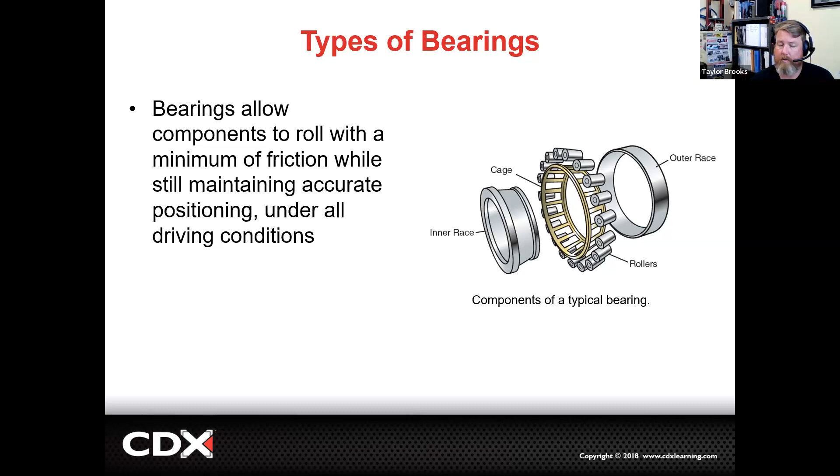So there's a lot going on when we look at individual bearings. We have a wide variety of different types of bearings, and each bearing will have its own specific unique design that makes it beneficial for that particular job.

When we look at wheel bearings versus bearings in between shafts of a transmission, they're going to have different design characteristics that they have to be under. So we'll use one bearing in one task but not in another—they're not going to be all the same.

Obviously too, keeping these bearings lubricated, cooled, and maintained is going to be another key characteristic. To go back to that throwout bearing, there's very little maintenance you can do to it. Early vehicles had an access cover where you could put a little bit of grease—it had a Zerk fitting and you could grease the throwout bearing. But modern vehicles, it's sealed in there, and it's sealed for life.

When we're looking at the life expectancy of a vehicle being anywhere between 150 and 500,000 miles, that bearing's going to live a pretty hard life and have to live it with a very meager ration of grease. And it's understandable if they fail over an amount of time.

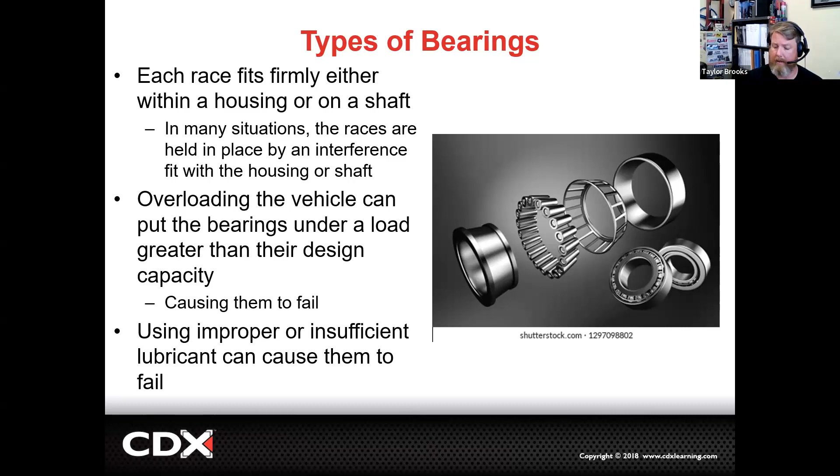Different types of bearings we're going to have fall under two main camps in terms of design, and then they can vary from that point. We're either going to have a serviceable bearing, meaning we can take apart the outer or the inner race and get access to the rollers, the balls, or the needles, and it can be repacked with new grease—you can pack new grease in, clean them, adjust them for preload and tension, and they are otherwise disassemblable.

The second main category is a sealed bearing, and we're seeing more vehicles come with sealed bearings. This is a bearing that is sealed up and not meant to take apart. Often people will look at it as, oh yeah, it's sealed from the factory—the bearing is constructed with your inner race, your roller, the caging system, grease or oil is put in it, and then you have the outer race, and the outer race has metal seals kind of keeping everything together so that once these bearings go bad, they go bad.

You can't rebuild them, you can't repack them, you can't adjust them. They are what they are. Now that being said, there's a lot of people that will say, oh, they don't make it the way they used to, you used to be able to rebuild bearings.

Well, the reality is car wheel bearings now, even for the smallest Hyundai Accent or Honda Civic, are much larger than the front bearings on something like a Cadillac Fleetwood. So they're much larger, much more robust, and able to withstand much more strain and pressure. So having a sealed bearing isn't that big of a deal.

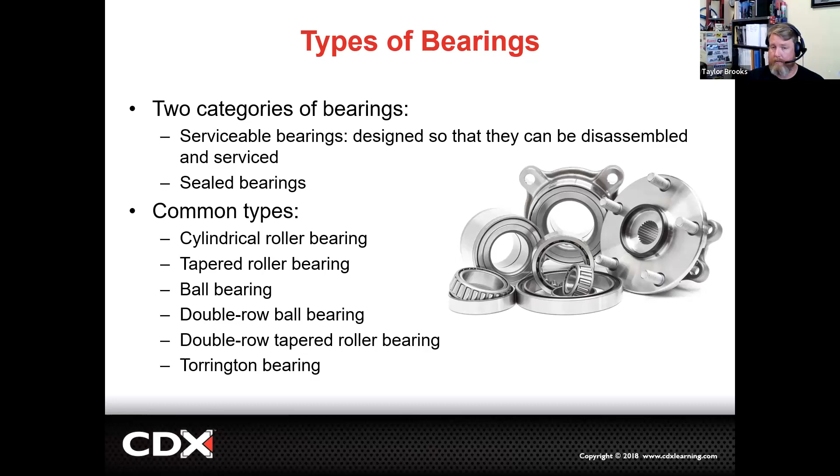Now, whether it's sealed or serviceable, we have a bunch of different designs in terms of what type of bearing it is: cylindrical bearing, tapered roller bearing, ball bearing, double ball bearing, double tapered roller bearing, Torrington bearing, and then solid bearings, bushings, and so on. So there's a bunch of different options out there, and each manufacturer will look at the different design characteristics for each one.

A very simple bearing that a manufacturer might use, and you'll see these a lot on manual transmissions, is a single row cylindrical roller bearing. This has rollers that go around an inner and an outer race and are caged. They can be sealed or non-sealed.

These are bearings used when there's no side load applied to them, so they're just supporting a shaft. That's why we tend to see them on manual transmissions. When we take apart manual transmissions, you'll see this as the front bearing for the input shaft. You can see it as the pocket bearing, which is the most important bearing inside the transmission, and you can also see it supporting the output shaft and the counter shaft.

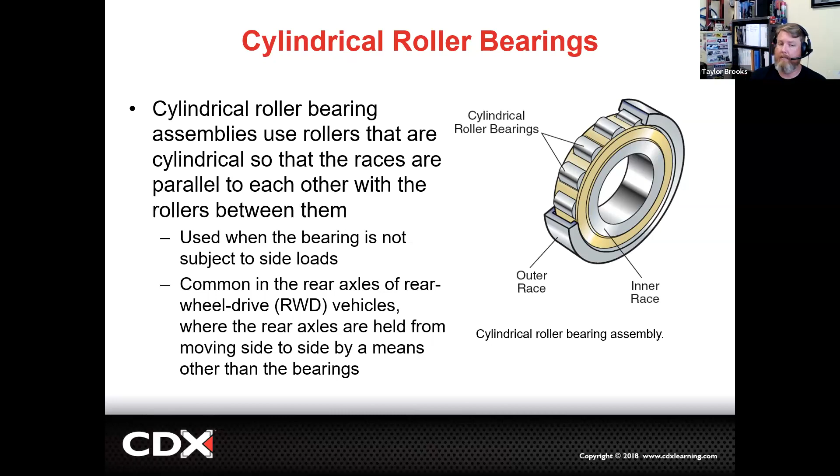They don't like a lot of side load, which the transmission isn't going to give them - it's just reducing friction and supporting the shafts. But where you won't see these is as front wheel bearings. You will see them on rear wheel bearings, but a lot of manufacturers tend to use the other design, a tapered roller bearing, instead because it can handle more torsional load.

Now, these cylindrical bearings tend to either have just an inner race, or more often than not, an outer race, with the cylinders locked in place. The inner race is usually the shaft of the transmission or transfer case or whatever it happens to be, and when this is the case, that is a wearable surface.

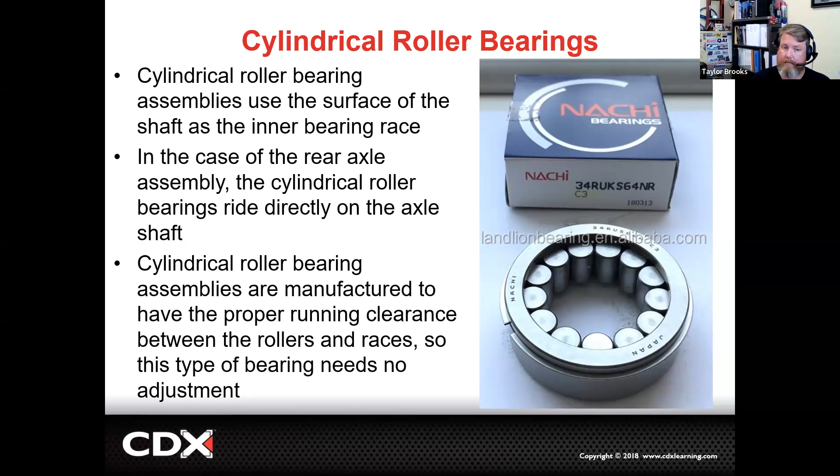Now, the next design, which you see a lot more often because it can handle side loads, is a tapered roller bearing. Under the same kind of guise and design as our roller bearing, we have cylindrical cones, cylindrical bodies going around an inner and outer race, but the difference is they're at an angle. So our inner and outer race will be at a particular angle, and this angle varies depending on how much side load or thrust that bearing can support.

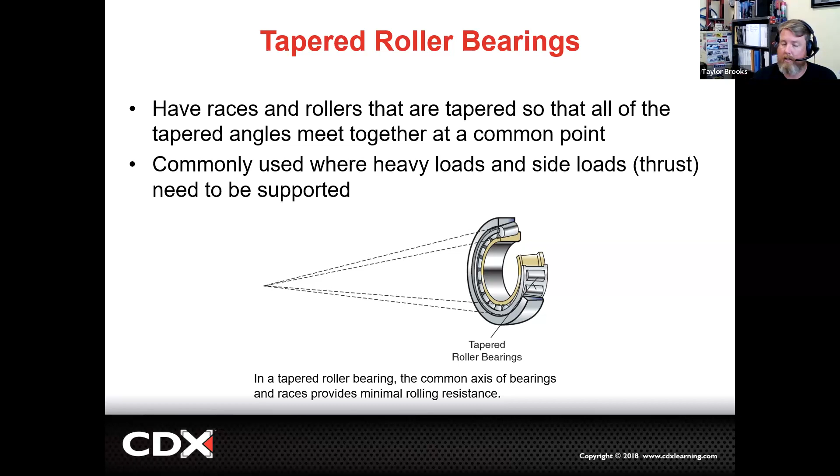The greater the side load, usually the more thrust it can handle, but the more preload and strain the bearing will have. Usually you're looking at anywhere between 20 to 30 degrees. I have seen 40-degree tapered bearings - they do exist, but again, it's dependent on the manufacturer. These bearings operate under very light load and friction, but they do require preload, an amount of pressure put on the inner and outer race against the rollers, so as to not have them fail.

Now, you can have it either as a shim or as a threaded collar. What preload is doing is putting a set amount of load or tension on that bearing to allow for full contact against both races.

Why we have to do this is if we don't have the preload, the bearing will chatter on itself and it'll fail prematurely, usually pretty quickly. So it's very key that anytime we're replacing a tapered bearing, we always double check our preload.

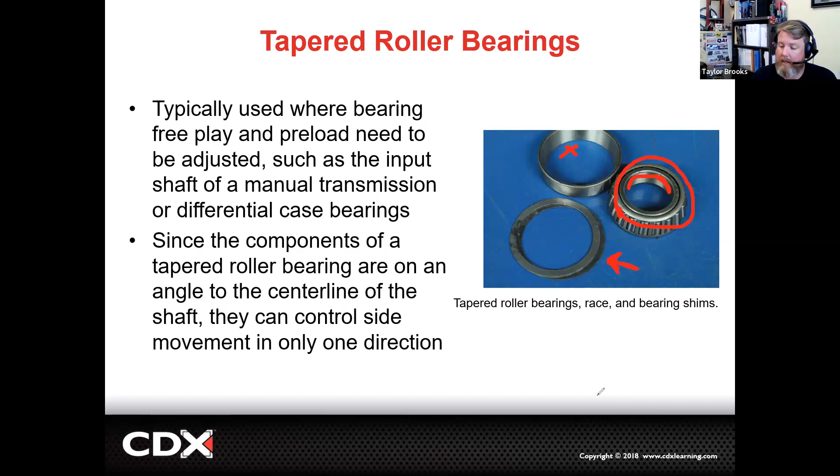Our preload can be checked usually with a turning torque or breakaway torque wrench to measure how much it takes to start to rotate that bearing.

Now, tapered roller bearings can be used in a bunch of different applications. They can be in the supporting role of the different shafts inside of the transmission case. You'll find them in transfer cases, and you'll definitely find them in differentials - these will be the side bearings, the pinion bearings, and often the wheel bearings in the rear.

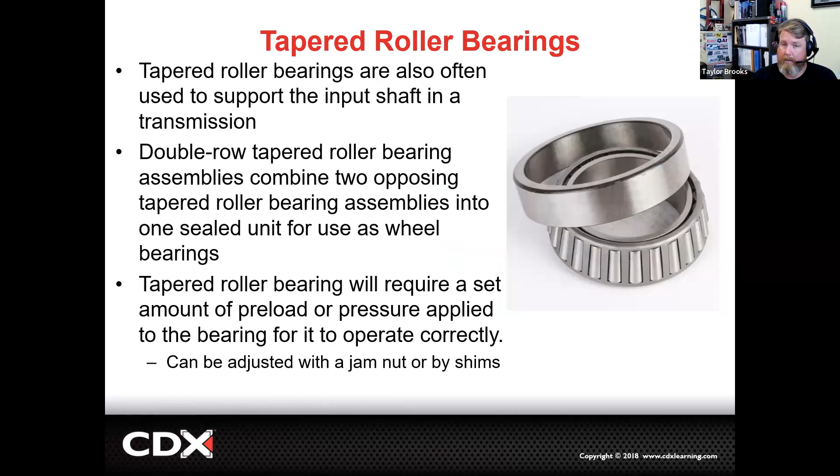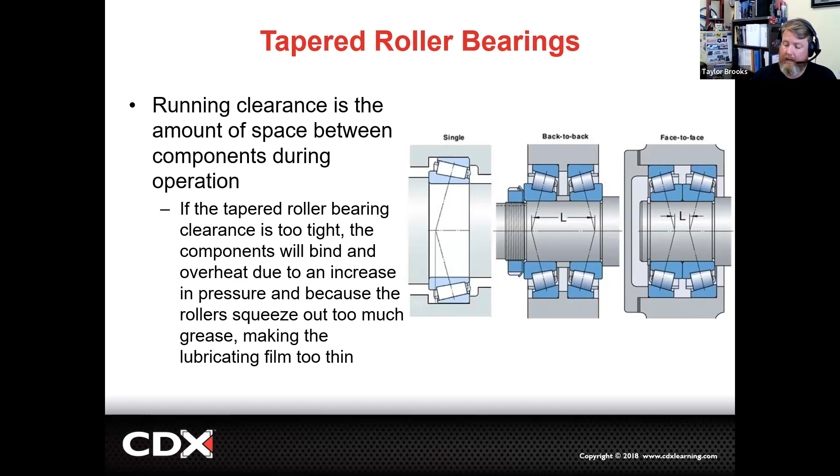We can also have these in a double row configuration, which we'll talk about in greater detail, to support an axle shaft or more often a wheel bearing. Because the tapers are going opposite of themselves, they're able to withstand a lot more thrust load being applied to them.

We can also have ball bearings. Ball bearings operate off of a much lower friction rating than the other ones, meaning they are more efficient. The downside is that our straight roller and tapered roller bearings have really big surface area, so they can handle a lot greater loads.

For ball bearings to handle greater loads, we either have to increase the diameter of the ball bearing itself, which increases the overall bearing size, or we have to run them in multi-row configurations.

Our ball bearings will have kind of unique inner and outer races that allow for full support of the roller ball itself, and that will control our side load, so we don't have as much chatter as we would with a regular roller bearing.

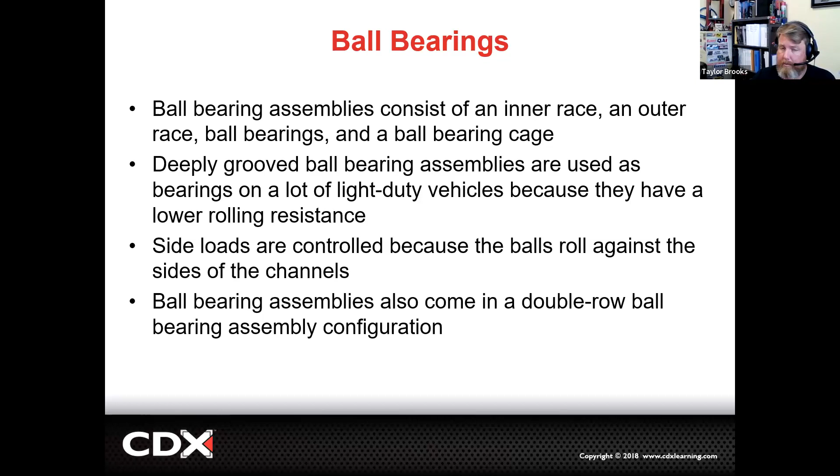Again, we can have these in multiple configurations, double row or single row. Usually we're going to see double row configurations as wheel bearings, and that increases the surface area that was its kind of weak link. When you combine them as a double row bearing, they do support a lot of side load plus a lot of regular weight.

More often than not, when we have them as a double row, the inner race will be two pieces - so you'll have a top or bottom, or left or right inner race - and then the outer race will be one piece. That's because the outer race is usually going into the fixture of the steering knuckle and/or the transmission case to support everything.

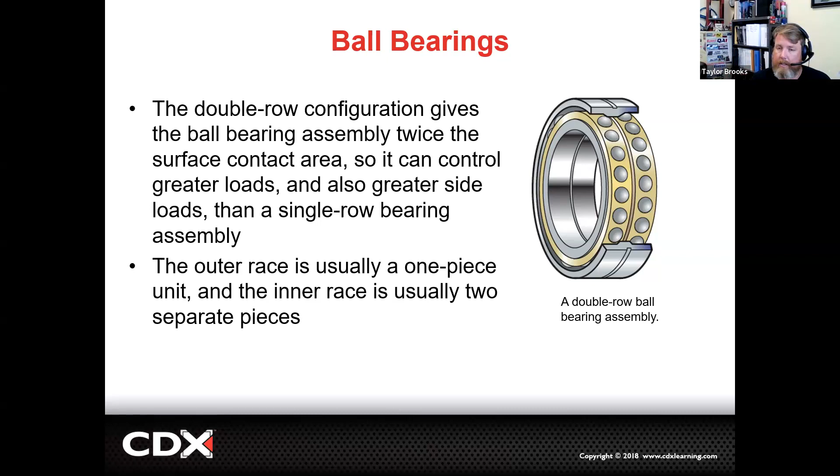Inside of our transmission and transfer cases, we'll see something called a Torrington bearing. A Torrington bearing is a very small, flat, thin roller bearing, but the difference is, where a straight roller bearing or tapered roller bearing has rollers very close together - in a tapered roller bearing they'll have some separation with the bearing cage, but in a straight roller bearing the rollers are rolling against themselves as well as the inner and outer race.

A Torrington bearing is going to have separation. A Torrington bearing is going to be able to control thrust movement inside of a transmission or transfer case - that movement in or out. You will see a lot of these in place for low friction applications.

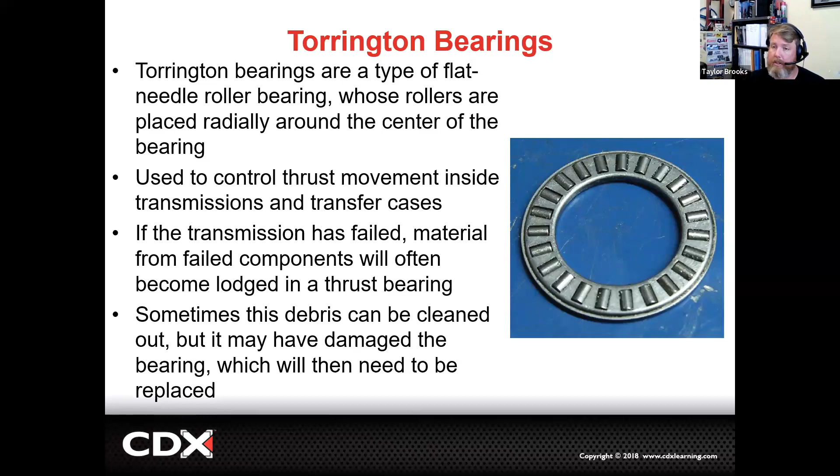They can also be replaced with a bronze bushing. However, that does build up the friction and make that transmission less efficient.

Friction bearings or bushings are solid, single piece bearings or bushings. They're not going to have any rollers. More often than not, inside a transmission we'll see these supporting shafts on early transmissions that didn't need the efficiency.

But primarily, where you will see these on modern vehicles is our pilot bearing. The pilot bearing supports the end of the input shaft so the clutch can operate, and is typically located in the back of the crankshaft or the flywheel.

These can be made of a bunch of different materials, but usually they're made of a material softer than the shaft it's supporting. So if our input shaft is made of steel, we can have these made of bronze or brass, a softer material.

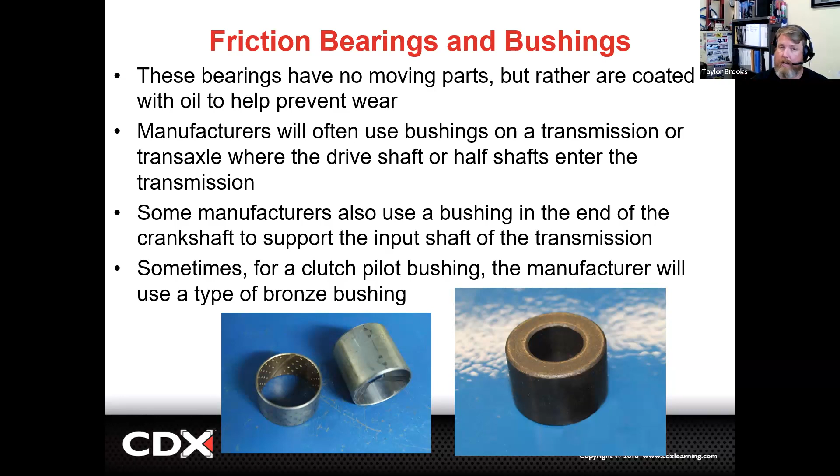In some cases you can have some lubrication on these bushings, but for the most part these are going to be dry bushings, so the softer metal acts as its own lubricant.

Now, all of the different types of bearings we talked about in the last couple of slides can be a sealed design. A sealed design, as I mentioned at the beginning of the lecture, is a bearing where the inner and outer race are stuck together mechanically, with a metal seal, and all the grease and lubricant is pre-filled into that bearing and never needs to be changed.

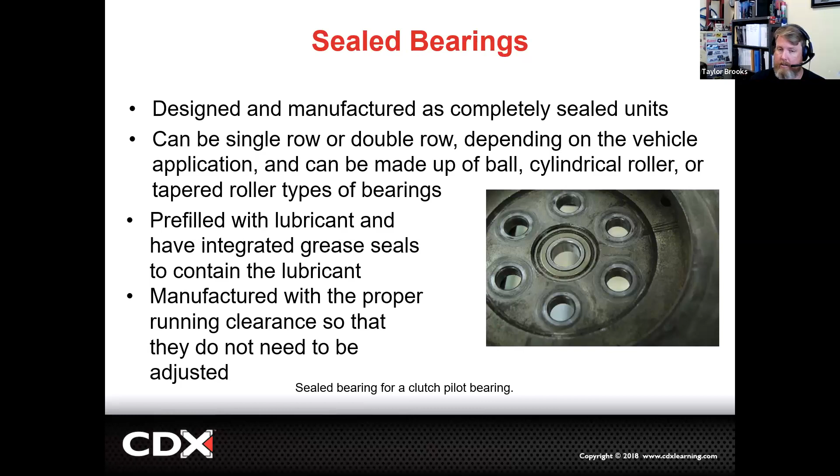The running clearances on these are already set, so any preload that's in there—because you can have a tapered bearing or a double taper roller bearing—will have the set amount of preload and lubrication already installed. A lot of modern wheel bearings are set this way.

This can be supportive of a wheel bearing hub assembly and the wheel face hub with new studs, as well as usually a pickup point for the ABS sensor or wheel speed sensor.

That can be used off of a magnetic pickup wheel, or we can actually have a magnetized part of our wheel bearing race itself act as the tone wheel for that speed sensor, for use in the ABS and traction control.

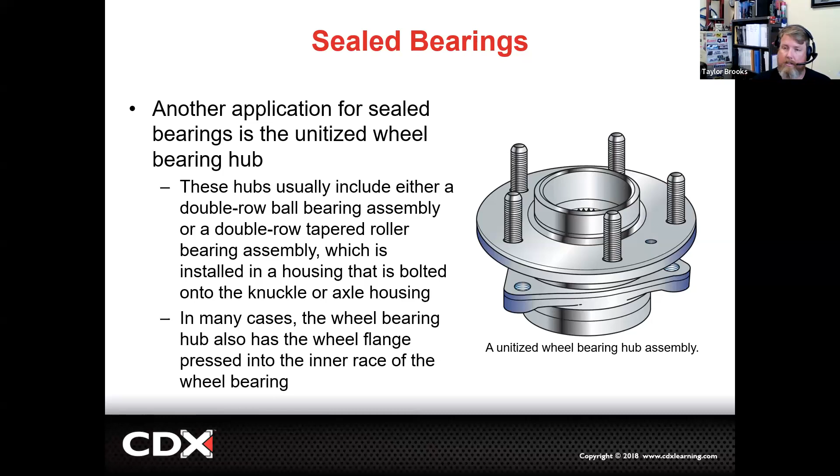When we look at serviceable wheel bearings, that indicates we can take the bearing apart. However, we still need the grease and lubricant to stay around the bearing rollers, so we'll have to have a serviceable seal or gasket.

Now, these gaskets or seals typically are considered a dynamic seal, and you will see a test question about that. A dynamic seal indicates that it will statically be in place, but it will be sealing something that is dynamically moving, like a spinning shaft or a moving rod.

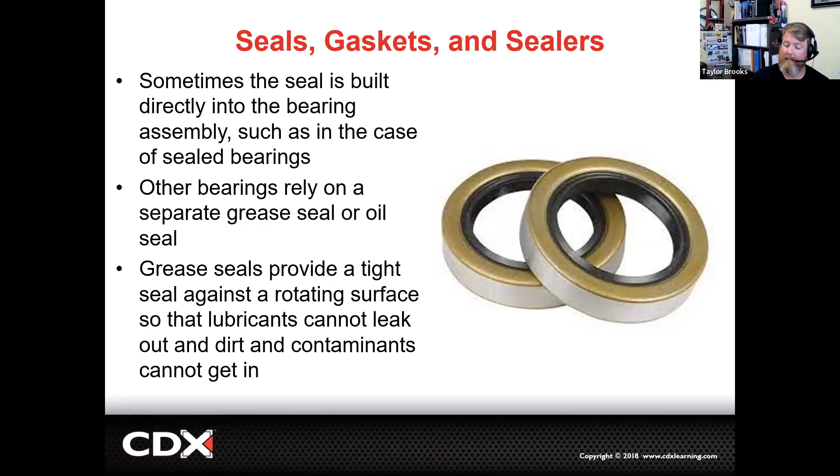These seals have to be able to keep dirt and debris from getting in, but also allow the lubricant to stay in place. They've got a really, really tough job.

One way to make that job a little easier is with lip seals, which have what's called a garter spring. The garter spring puts tension on the lip seal. The lip seal comes to a point and rides across the shaft or sealing surface, and that spring provides constant tension.

That constant tension means dirt and debris can't get in, and grease and oil can't get out. The lip design has a specific direction that it faces.

So oil that might be forced out through centrifugal force actually gets turned back around and sent back into the case via some fins, and dirt and debris won't be able to get in through the other, usually reinforced, dust shield portion of the seal.

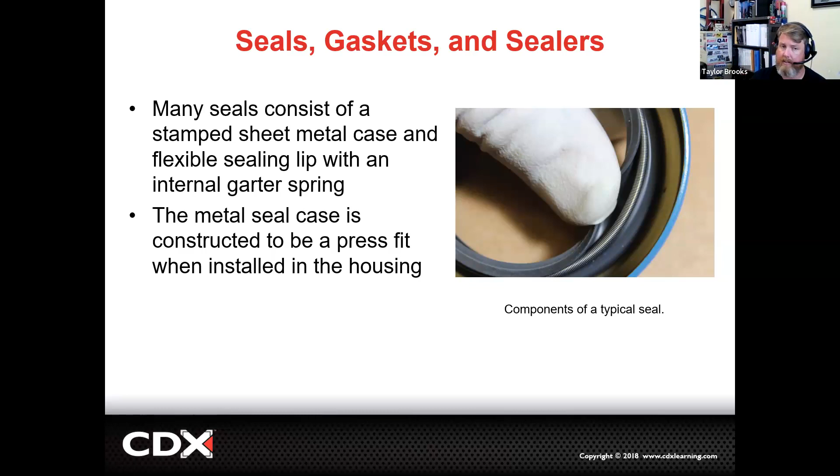One interesting thing that happens with garter spring seals is that because the garter spring is putting constant tension on the sealing lip, over time you can wear a groove in the sealing surface.

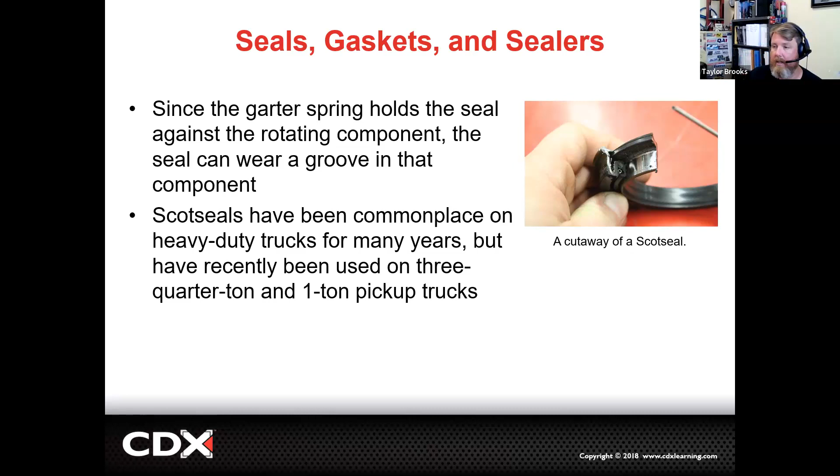It's kind of funny because a rubber seal can wear a groove in a steel component. Quite often, what can happen is that sealing surface needs to have either a sleeve put over it or it needs to be remachined, and an undersized or oversized seal installed due to that machining process.

To allow these dynamic seals to operate correctly, they will have an interference fit against the housing they're riding in. So if it's supporting a steering knuckle, spindle, or shaft that spins dynamically independently of the hub it's on, the seal still needs to be fixed into that. There will be a slight interference fit, meaning the outside diameter of our seal will have a greater dimension than the inside diameter of the hub it's being applied to.

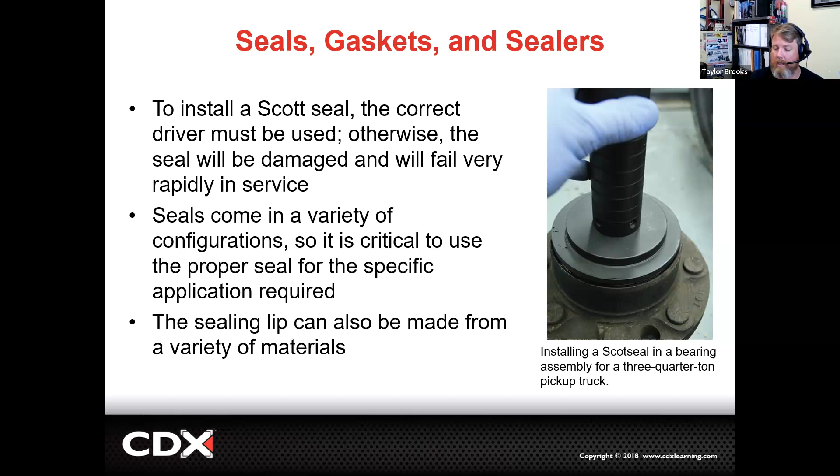It's really important to use the correct tool when installing these seals so you don't damage them, punch them all the way through, or get them crooked. That's a fault I have quite a bit - if you don't have the right tool and try to very lightly tap in the seal, I tend to get them crooked. For whatever reason I have a hard time with that. So it's always good practice to find the correct tool so you don't cause additional damage or wreck your brand new seal before it's even been used.

We can also have just regular O-rings. Now these would be considered non-dynamic. So in this case, we have an output shaft or a speed sensor on a transmission case, and it has an O-ring located on the body of the sensor itself. This is non-dynamic - the speed sensor isn't moving, neither is the case. It's just kind of a static seal preventing dirt and debris from getting in and fluid from getting out, but it's not going to cause an issue where we're wearing a groove on the case or on the speed sensor itself.

Now these seals, I should say, do go flat over time. So where you have an issue in terms of wear, or why they might leak, is either rapid expansion and contraction during different thermal events of that component, which can cause the seal to go flat over time. Then fluid, dirt, and debris can get around that, and the seal is otherwise not usable anymore.

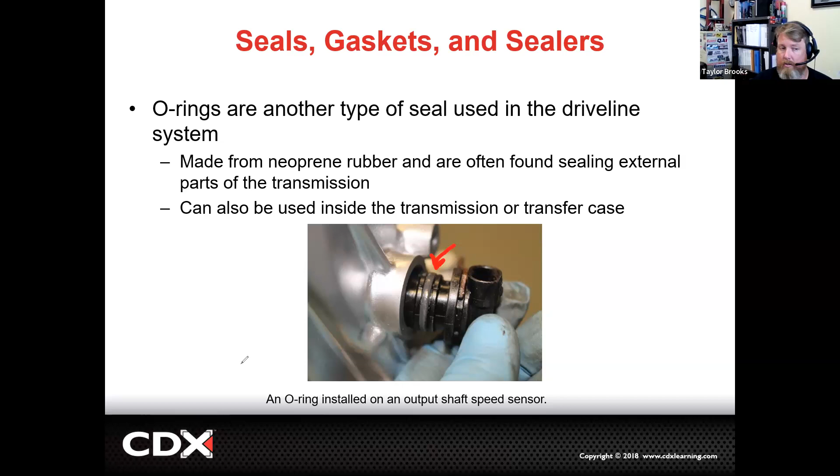We can have a variety of different gaskets too. Oftentimes, when we're looking at transfer cases and transmissions, we won't have any gaskets. Most manufacturers go to where they have such a fine machine surface that we'll usually be using an anaerobic style sealer or gasket maker. Anaerobic means lack of oxygen. So we have such a fine machine surface that this anaerobic sealer can seal up, and because there's a lack of oxygen it will harden and prevent fluid from leaking out and dirt and debris from getting in. But we can also have rubberized seals with metal membranes inside to add some rigidity.

We can have straight rubber or cork style gaskets. These gaskets require a small amount of fluid to expand out so that they can swell and operate in a manner that takes up all of the different little variations. And then we can have different paper gaskets - this will be a special fibrous paper that allows it to expand out and seal everything.

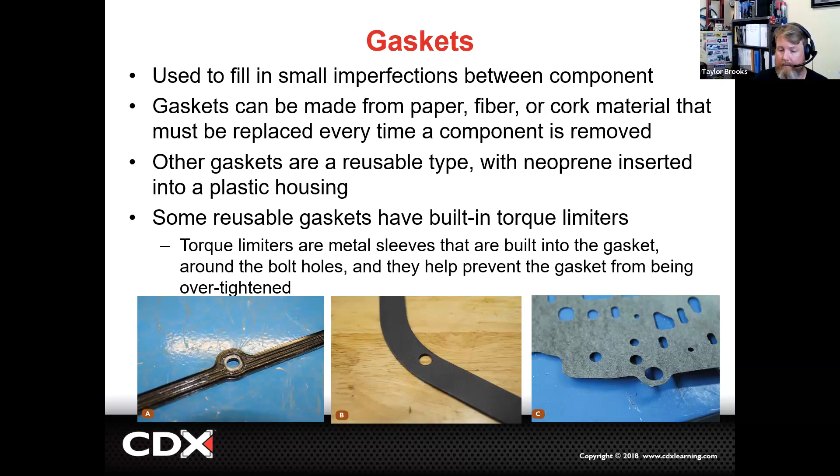I brought up that some cases will use an anaerobic sealer - an anaerobic sealer is a gasket maker. Another common one is RTV, standing for room temperature vulcanization. What that means is that under ambient normal temperatures, the liquid sealer will come out of the container and turn hard based off of just the normal room temperature.

Oddly enough, some of this RTV does require a set amount of humidity in the air for it to fully harden. So you'll see some mechanics have a little spritzer bottle, especially in dry areas like the Southwest here, and they'll spritz the RTV to try to encourage it to harden up and seal. Now RTV is preferred by manufacturers now because it fills the machining imperfections, and it's really cheap.

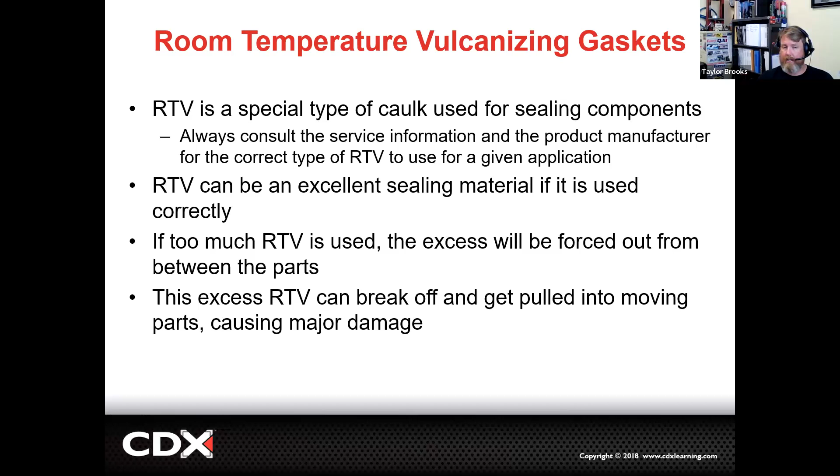You can have a tube of sealer be the one-size-fits-all sealer, so the manufacturer doesn't have to design gaskets for each individual case half.

It is important, though, to make sure that we get the right sealer for the right job. If you go to the parts store, there's a multitude of different sealers you can choose from as a mechanic. But it's going to be really important that we make sure we get the right one based off the material we're using and the fluid it's trying to seal against. Also, temperature and how much it will expand and contract are two big key characteristics to make sure we get the right sealer for the right application.

Where it is an issue is on transfer cases. Almost all modern transfer cases have a pump and a pickup, and that pump is used for our locking clutch for 4 low versus 4 high. If we have too much silicone or RTV sprayed into the case of that transfer case, it can plug the pickup and cause a lack of lubrication in that clutch, which can burn up and prematurely damage the transfer case.

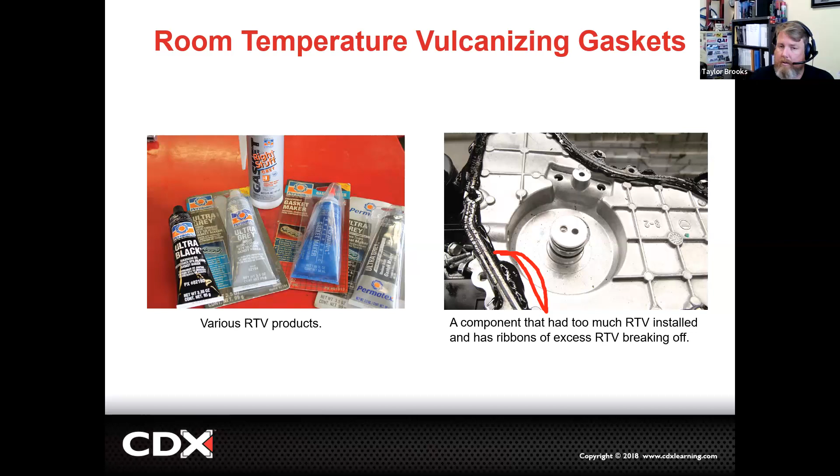So it's really important we use the right amount, and follow service information for not only the correct RTV silicone, but also the right amount to apply. Where we'll also see some sealer needed is on the threads of the case for the transmission and transfer case itself.

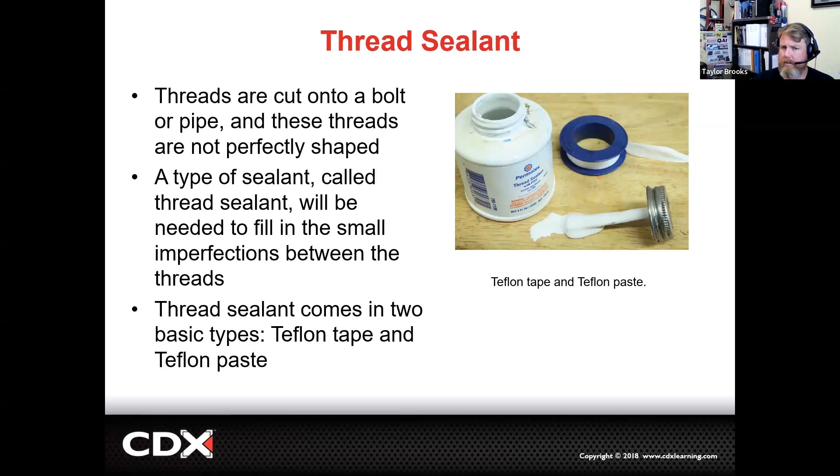I've also seen thread sealant needed on the pinion nut of the pinion shaft of the differential, but we tend to use liquid Teflon sealer. Don't use tape - honestly, it's not a good idea to use tape in any automotive application. The liquid Teflon gets into sealing the imperfections of the case at a greater rate, and we don't run the risk of the tape burning and/or collapsing or going into a bore. So use liquid Teflon when you can.

Removing these gaskets is going to be really important. The machined surfaces of our transmission cases, transfer cases, and differential cases are very finely machined, and they're also almost always, with the exception of differentials, made of aluminum. So we need to use a non-marring way to remove the material.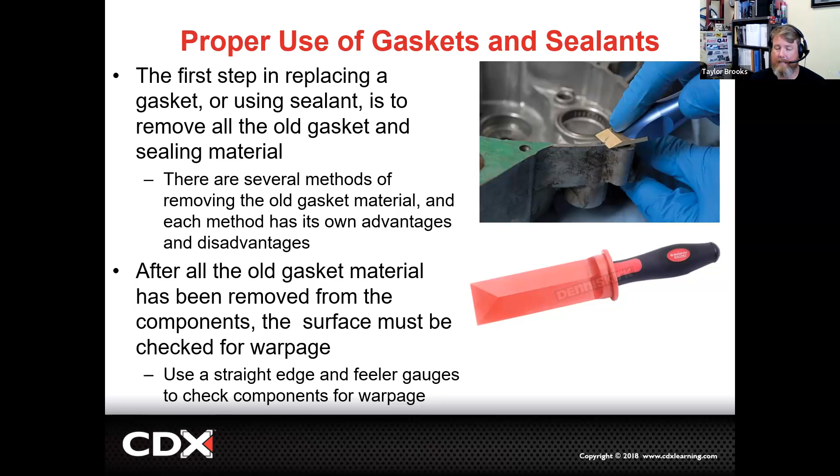But we do want to make sure we are not causing any warps or damage when removing these gaskets. A good check to do afterward is to go through with a feeler gauge and check for case warpage. We hold a straight edge across and use a feeler gauge - you don't want to be over 2 thousandths of an inch. 2 thousandths is usually the general limit we can't exceed for case warpage or difference in surface. We're also looking for any types of over-torque or damage to case structures.

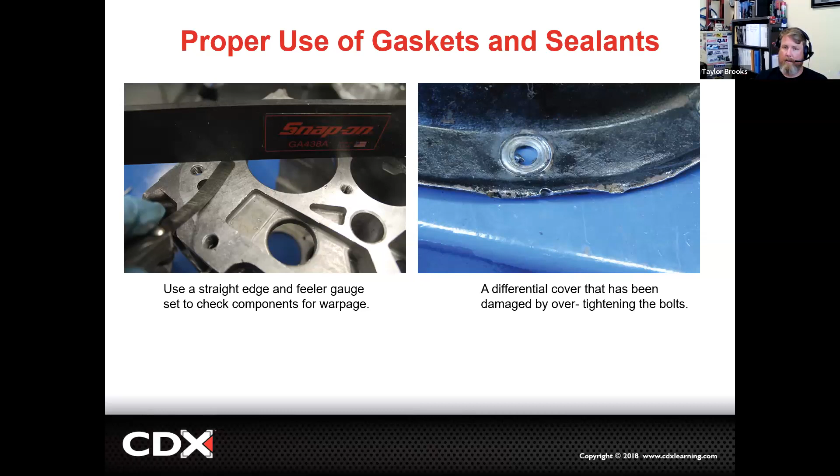This is especially the case if we have a transmission case that's aluminum and we have a metal pan that's bolted to it. More often than not, they can very easily get over torqued, and we can see that with the photo on the right there, where that bolt has started to groove and eat into that pan or that cover.

I often, to correct some of these issues on steel pans, use a body hammer, and oftentimes a couple light taps with the hammer will straighten it out. A ball peen hammer will do the same thing.

The reason why I like a body hammer is you can get body hammers as either a shrinking or a stretching hammer, or you can get them as a neutral one. A ball peen, depending on how you hit it, will shrink or stretch the material. So ideally, you want to try to maintain it as flat as possible. You don't want to hit it on the side or anything with the ball peen - you hit it nice and flat and straight with a regular hammer.

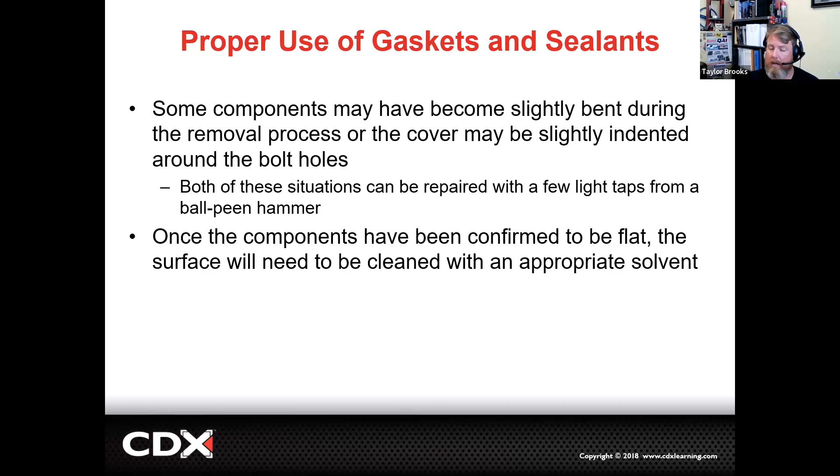If we have a gasket, or if we don't have a gasket, but we have multiple bolts on the flange of whatever device we're torquing, whether it be a transmission case, a T case, differential cover, or adapter housing, we want to make sure that we're using the proper torque sequence.

When we have a gasket, the gasket has to be collapsed down in a manner to where the forces evenly distribute on it. So we try to go in a cross pattern to allow for that gasket or sealer to flatten down nice and even and not have one side up over the other, because that can cause a leak, as well as damage the threads and potentially cause a crack in the main housing of the unit. So following the proper torque specification and then also following the sequence is really important.

Even if you don't know the sequence, if you go in a cross pattern, going across to the next side and then doing that in a spiral, you're usually going to be able to torque it nice and even without any dramas.

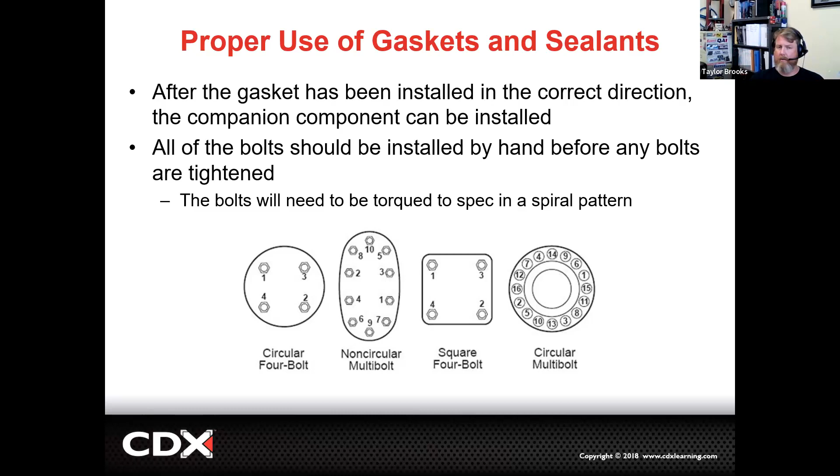Now, lubrication is going to be the main thing that we are trying to keep in with these seals. Having the right lubrication is going to be very paramount. Each transmission will use different lubrication based off of a couple key factors.

For a manual transmission, we're almost always going to have a determining factor being what the synchronizer construction is. The synchronizers can either be solid brass or bronze, and in that case, we can use gear oil. Usually, though, we're using a lighter gear oil. In fact, in some cases, on some Mercedes transmissions serviced in Chrysler vehicles, you're using engine oil - 5W-30 or 5W-40 engine oil. You're not using anything heavier than that, because heavier materials would not allow for smooth and frictionless operation.

If the friction lining material on the synchronizer is paper, then we will be using ATF, automatic transmission fluid, instead of gear oil. The reason for that is that friction lining is going to be very similar to that of what we're going to have in an automatic transmission. It's going to be a paper-based friction liner, and that will then require the use of automatic transmission fluid because it can withstand the different temperatures increasing and decreasing for that paper, as well as prevent it from shrinking, and will allow it to be swollen in the right dimension.

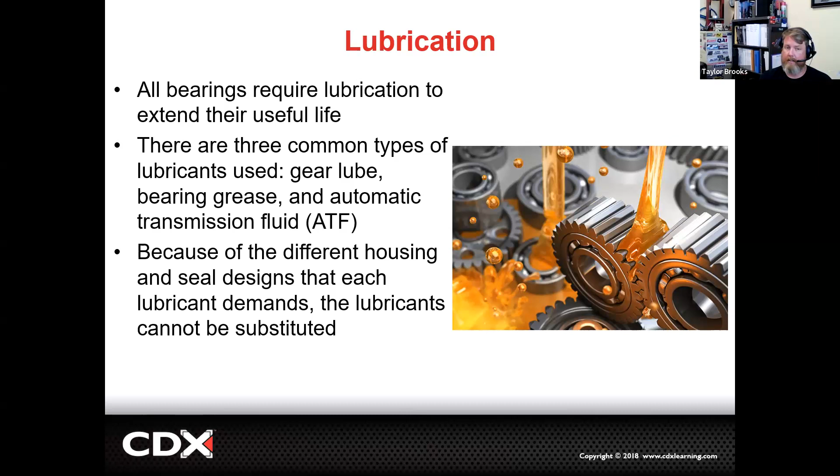Always refer to service information anytime we're looking at servicing the transmission and or differential. When we look at a differential, for instance, it might take a multi-grade weight or it might take a single weight, and the service info will give us that information.

A main thing to look at for a differential, though, is whether or not it has a limited slip set of clutches to where we need to put a friction modifier in the fluid. The friction modifier is going to allow for conditioning of those clutch discs so that they don't slip. If we don't have the friction modifier in it, we're going to cause the clutch disc to chatter and ultimately fail prematurely.

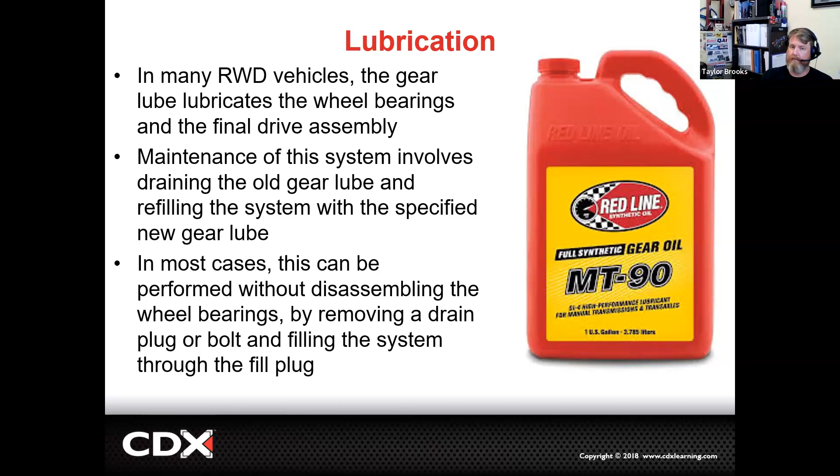Checking the level on a lot of these systems is pretty simple. Almost all of them will have a fill and a drain plug.

Automatic transmissions often require removing the pan to drain the fluid. But in manual transmissions, we're almost always going to have a drain plug with a corresponding fill plug. Same thing with a lot of differentials. However, if it's an iron differential, oftentimes we have to remove the cover to drain the fluid. But these drain and fill ports are put there for easy maintenance.

Anytime I'm doing service on a case that has a drain and a fill plug, I remove the fill plug first, for a couple reasons. The first reason is you'll be able to check the existing level. Oftentimes the fill point for our transmission cases, or differential cases too, is going to be right at the bottom of the threads of the fill plug.

You especially want to do this if you know the system has no leaks. If the system has leaks, you're checking to see how much fluid has leaked out, because potentially that's where you might want to start inspecting for damage. But if there are no known leaks and the system's been sealed from the factory or by reputable mechanics, we want to check the level because it might be slightly lower. Filling it too high would cause the fluid to cavitate, can cause bearing failure, and can cause the fluid to be pushed out of the seals, typically the vent or the pinion seal if it's a differential.

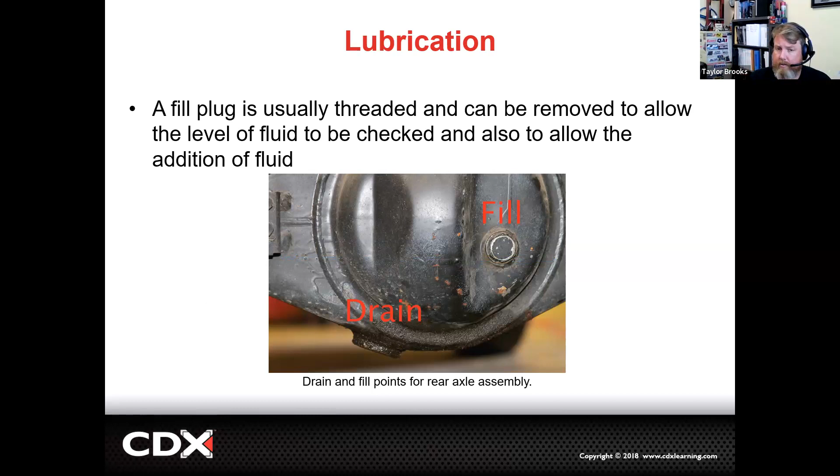Now, the viscosity rating is its impedance to flow. Oftentimes we're going to have multi-viscosity oils inside our transmissions and differentials. Our transfer cases tend to either use a single weight gear oil, or more often than not, a specific automatic transmission blend. A lot of times they're using their own specific fluid, like this is what we use, and it's only used in transfer cases.

But our multi-viscosity oils will have a viscosity that changes based on temperature. The W indicates cold weather, or 0 degrees resistance to flow. The second number, without the W, is the resistance to flow at operating temperature. We're going to have much thicker viscosities for gear lube than we otherwise would in an engine or anything else, up to 75W-140 as some of the options.

Based off of that thicker viscosity, that can obviously really affect the efficiency of how that transmission or differential operates. So it's very important to refer to service info to get the right weight oil, so as not to decrease our efficiency.

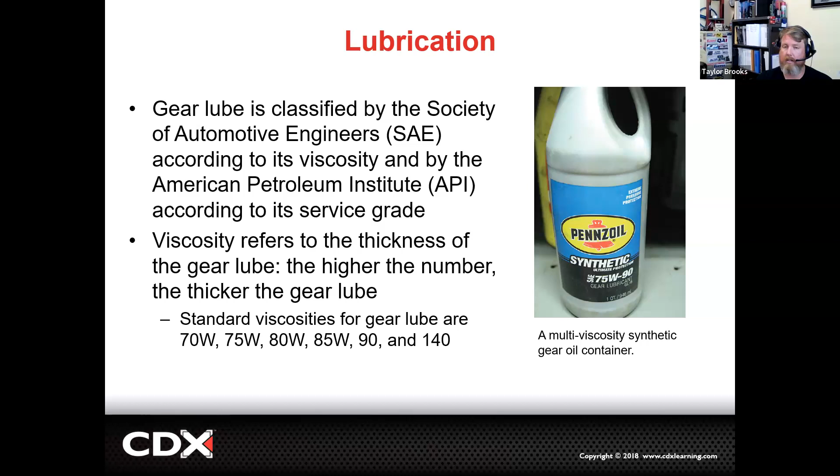These oils will also meet different ratings. They'll meet an American Petroleum Institute, or API, rating. We're looking at modern oils being GL5 and GL6. The book is a little out of date here, calling for GL4. The nice thing is, if you have an older vehicle that calls for GL4 rated oil, the new oils are backwards compatible, meaning if you have a GL6, it goes backwards toward that GL4 and can be used.

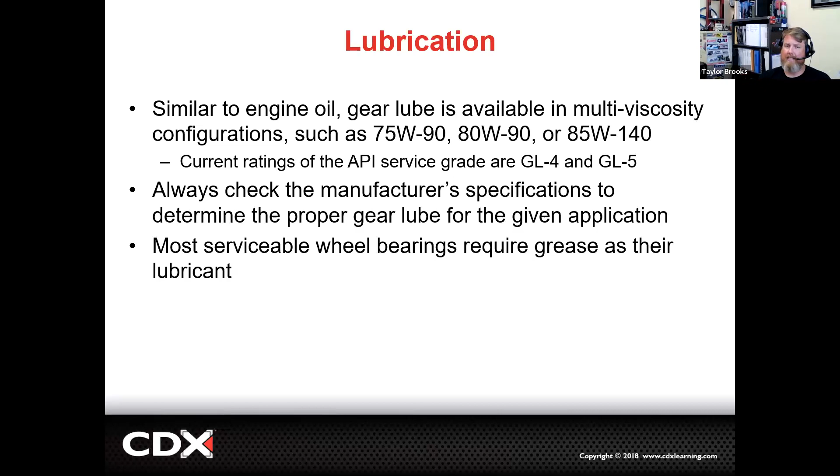Now, in terms of wheel bearings, they're usually going to have high temp grease, and grease is going to be much thicker than our gear oils and require a specific temperature rating. Almost always, you're going to have high temp grease for wheel bearings if they're a serviceable wheel bearing. Based off of that, we still want to make sure we're looking for the proper service information, so we're not using a grease that's not applicable.

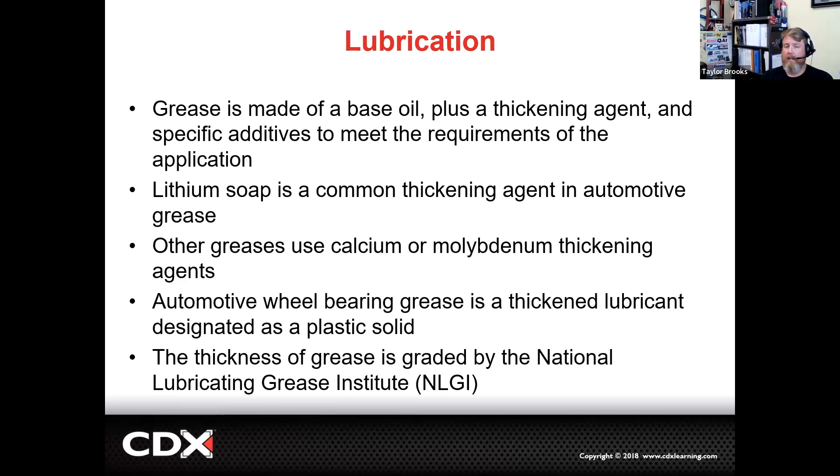Oftentimes these greases can have molybdenum in them, which is a darker material, often called by the shorthand term moly. These moly lubes allow for low friction use, but also allow the material to withstand higher loads.

As I brought up before, oftentimes some manual transmissions will use automatic transmission fluid. One key characteristic for that is the construction of those synchronizers. If this is the case, oftentimes transmission manufacturers will put a sticker on it, like what we have photoed on the right for our T56 transmission, which is a 6-speed transmission made by Borg Warner and Tremec. These transmissions will use automatic transmission fluid.

Just like the GL ratings for gear oils, in this case, this is calling for Dexron 3. If we have Dexron 6 or 7, which is what is out on the market now, it is backwards compatible and will work.

There's also a GM synchro mesh transmission fluid. That synchro mesh transmission fluid is a special transmission fluid that is a little bit thicker version of automatic transmission fluid. So it is safe and compatible with paper synchronizer rings, but adds a little more stability and stays more resistant to flow and cling on to components when used in a transmission.

It's also Pepto-Bismol pink, which is a little bit weird. Automatic transmission fluid is kind of a cherry limeade or cherry kind of color, but you can still see that it's see-through, to where oftentimes the synchro mesh can look like solid pink Pepto-Bismol.

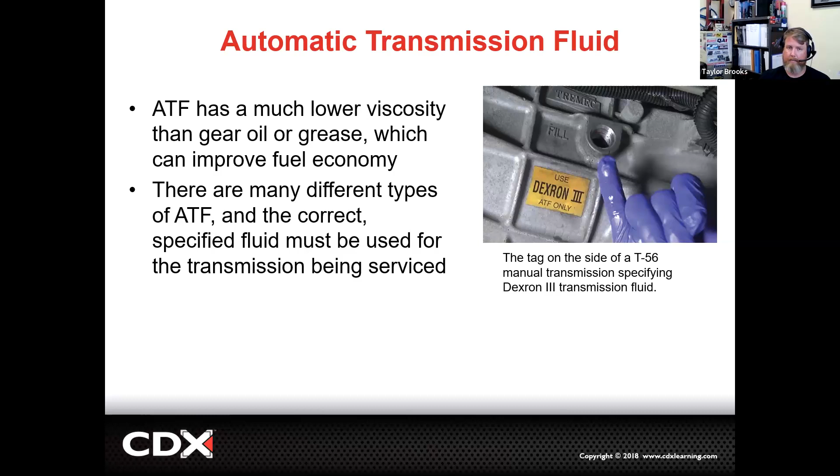Now, diagnosing bearings for noise is going to be the number one thing that you're going to see for why your bearing possibly has failed. They will talk to you to let you know that, hey, I'm not happy. More often than not, you're going to be diagnosing a bearing that has failed as a wheel bearing. Wheel bearings tend to not live as long a life, and that's usually because of the driver hitting large potholes or curbs or being overloaded. Over time, though, these wheel bearings can just wear out and require a replacement.

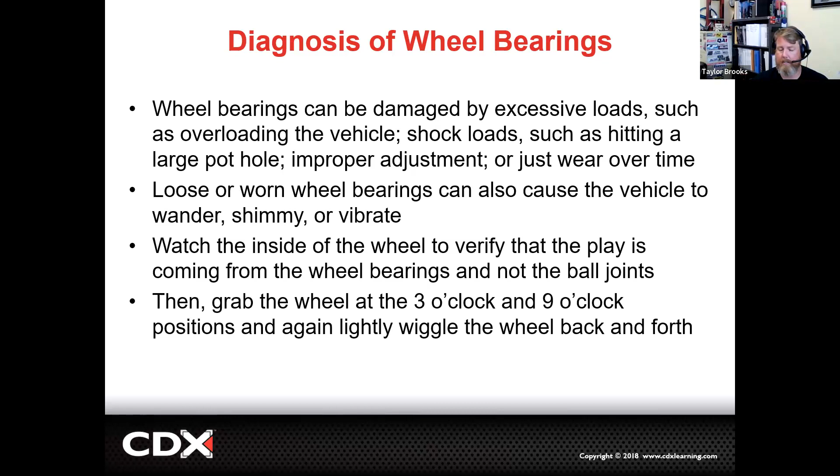Checking for loose wheel bearings you can do with a dial indicator, or by simply grabbing the wheel at the 3 o'clock and 9 o'clock position and moving it slightly. When moving it around, you can check multiple different areas and the wheel bearing will clunk. If you can only move it up and down in the 12 o'clock and 6 o'clock position, that's usually going to be ball joints. If it moves directly across, that's going to be tie rods. But if you can move it in a variety of different locations, that's usually an indication that the wheel bearings have gone. So the mechanic here is giving a visualization of what that might look like.

But you can also diagnose wheel bearings in a couple other ways. Usually driving the vehicle is going to be a big one. Often if we have a live axle vehicle, these wheel bearings can transfer their noise up into different components. We also might have a difficult time trying to delineate the noise, and quite often we're going to have to move the vehicle to one side or the other. Based off of whether the issue is with the bearing loaded or unloaded is how we're going to determine whether or not it's making the noise.

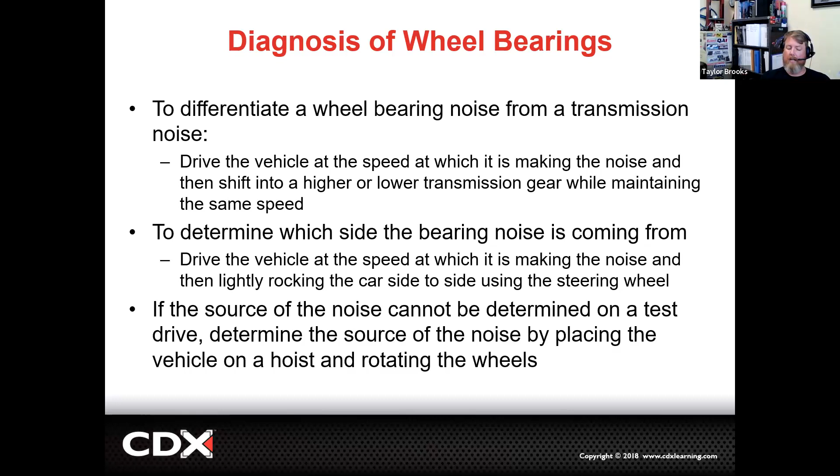So if we have a right front bearing making noise, if we turn the vehicle to the left, that can load the bearing up. And if the bearing is making noise only on coast, with the bearing loaded, it will quiet up, versus if we were to turn to the right, the bearing would become unloaded and thus make noise. Again, that's going to be based off of whether or not the bearing is making noise unloaded or loaded, and you're going to be driving the vehicle from left to right. Then you can monitor the frequencies or the noise with chassis ears. Chassis ears are little microphones that you can place on the vehicle in multiple different spots to diagnose that.

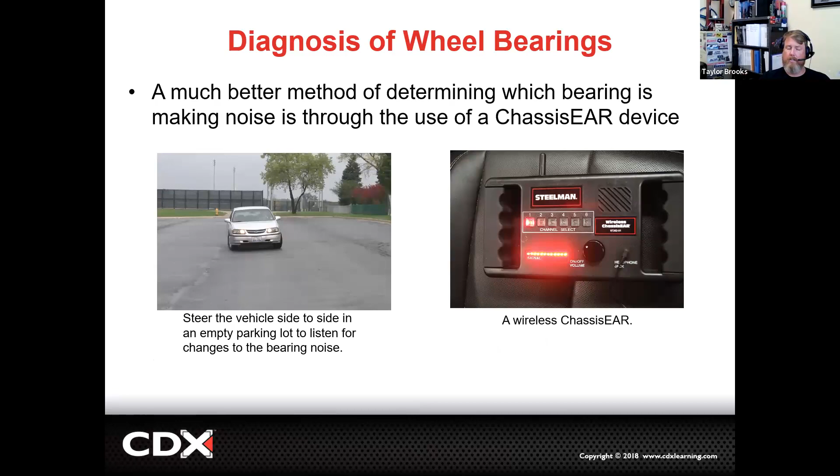Now that kind of goes through bearings, gaskets, and seals a little bit quickly. We will be looking at those in greater detail in every single chapter that we're covering, and we will look in greater detail at diagnosing our bearings when we come to the different transmission subsystems. But do keep in mind these are very important systems for a modern automobile to function, and we do need them, and they are required.